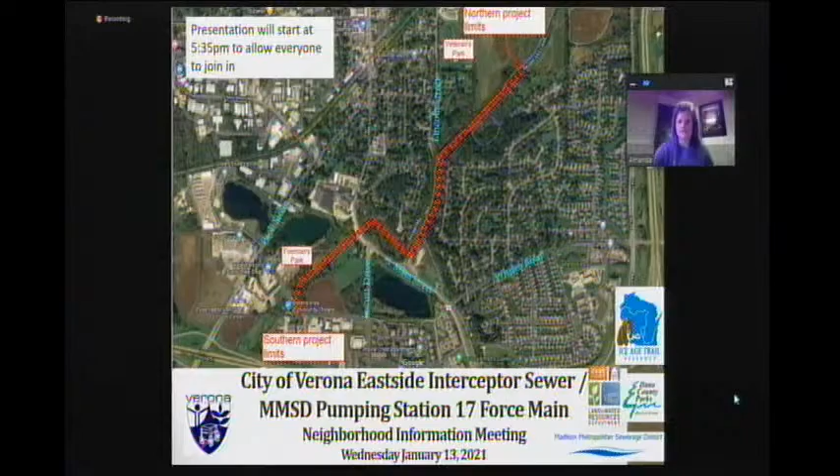We have several partners involved in the project on the call today, and we'll go through those presenters here in a moment.

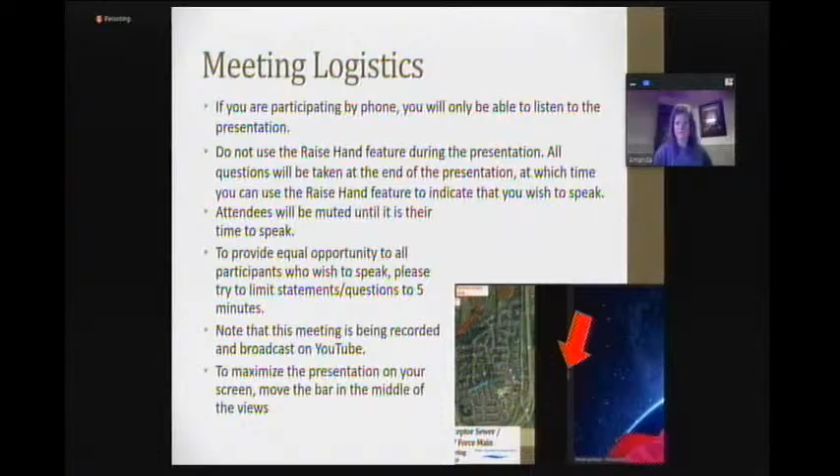So our agenda today: we just went through the logistics. I will talk about the project team and presenters in a moment, all the partners on the project. We'll give a little bit of history about the two projects, 2 in 1 so to speak, the Verona Interceptor and the district's force main, a little project overview. We'll talk through the various routes that were considered and how the decision was reached for the selected route.

Dane County will talk about their portion of the work. Ice Age Trail will also talk about their contribution. We'll talk about restoration of the area, including tree planting. There are a few renderings, and we'll also talk about trees and sewer pipes, since there's been some interest in that. Then ongoing communication, construction schedule, and as noted before, we will cover the Q&A at the end.

So our presenters today: Amanda Wegner, that's me, I've already introduced myself. This project is a joint project between the parties I'll go through now. With the City of Verona, we have Theron Jacobson, who is the Public Works Director, and Dave Walker, who is the Parks Director and Forester. They are both with us today.

With the district, we have Eric Jellin, who is the Project Manager. With the Ice Age Trail Alliance, Kevin Theseus, Director of Land Conservation. And then Dane County Parks and Land and Water Resources Department are here with us this evening: Sarah Riegelman, Park Property Planner, and Teresa Nelson, Stormwater Engineer.

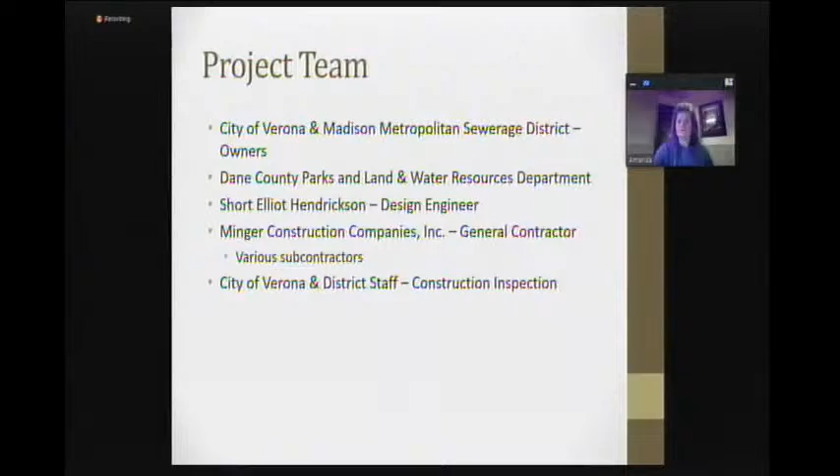The project team consists of the City of Verona and Madison Metropolitan Sewerage District, owners of the project, Dane County Parks and Land and Water Resources Department, Short Elliott Hendrickson as the design engineer, and Minger Construction Companies as the general contractor, with various subcontractors. Construction inspection falls to Verona and district staff.

From here, I am going to turn it over to Eric Jellin with the district. He's going to lay the groundwork, talking about a couple terms you might hear this evening, and then get into the history and a project overview.

Hey, thank you, Amanda, and thank you everyone for your interest and for attending. To start off, we wanted to define a few terms just so we're all clear on what we're talking about as we go through this presentation. There's some fairly technical definitions of terms on the screen here. I'm going to talk about them a little bit differently.

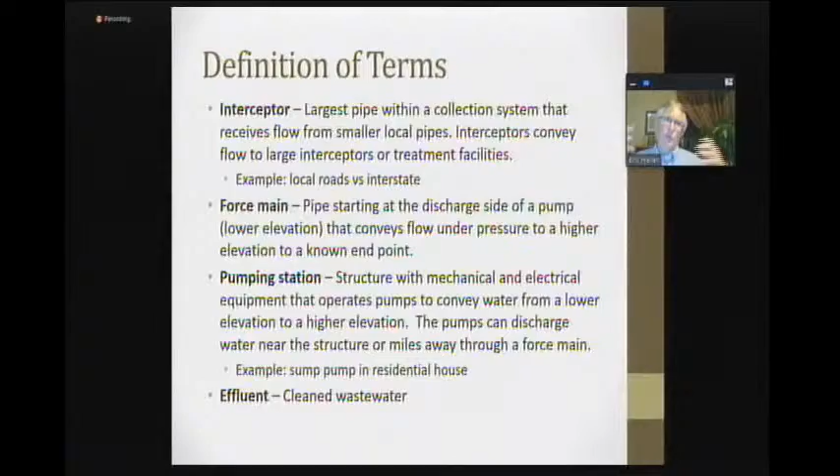So an interceptor pipe is - let me talk about the system first. The wastewater from your house typically goes through a lateral or service connection to a local sewer pipe. That local sewer pipe then joins a larger pipe, which is typically called an interceptor pipe. Interceptors catch neighborhood flows, and an interceptor can flow into another larger interceptor or go to a treatment facility. An example would be local roads feeding into an arterial road feeding into an interstate.

A force main pipe is basically a pressurized pipe. It's on the discharge side of a pump. The pump pressurizes the flow in that pipe and pushes it to a higher elevation. One example would be a sump pump in your basement - that's actually an example of a pump station, but the pipe from the sump pump would be the force main. In this case, obviously, we're talking about a bigger one.

A pumping station is basically a structure with pumps, electrical, and mechanical equipment. It's used to impart flow, to provide pressure to that flow, and convey it from a lower elevation to a higher elevation. Again, using the sump pump example, the sump is a structure in your house, the pump's in there, it pressurizes the flow, and pushes it out, hopefully to the street.

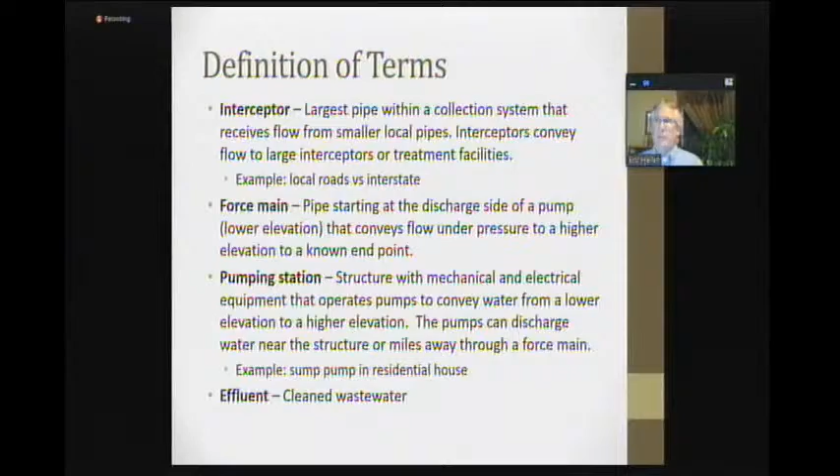Effluent is basically cleaned wastewater. It's wastewater that's treated at a wastewater treatment plant to standards where it can be discharged to the environment.

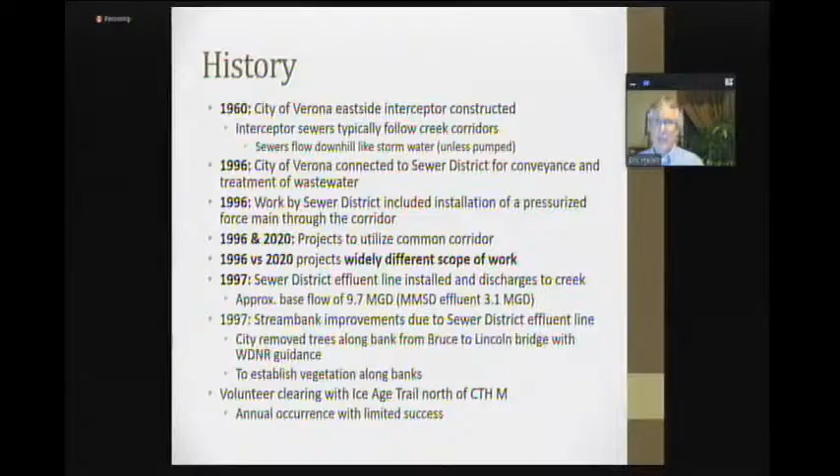A little bit of history on the existing pipes and the new pipes that are going to go in. In 1960, the city of Verona constructed the Eastside Interceptor pipe, and at that time the city treated their own wastewater, so it flowed to the city of Verona wastewater treatment plant. Sewers typically follow creek corridors.

The district has 96 miles of interceptors, and the majority of those are in creek corridors. The reason for that is you need your interceptors to be low enough to catch all the flow if you don't want to pump it. If you want it to flow by gravity, you have to be at the lowest point in the basin, and typically that's also where the creeks are, because they're flowing downhill too.

In 1996, the city decided to connect to the sewer district for conveyance of their wastewater. So basically, the city of Verona got rid of the wastewater treatment plant and instead now pumps all of the city's wastewater to the district. In 1996, the wastewater plant was demolished.

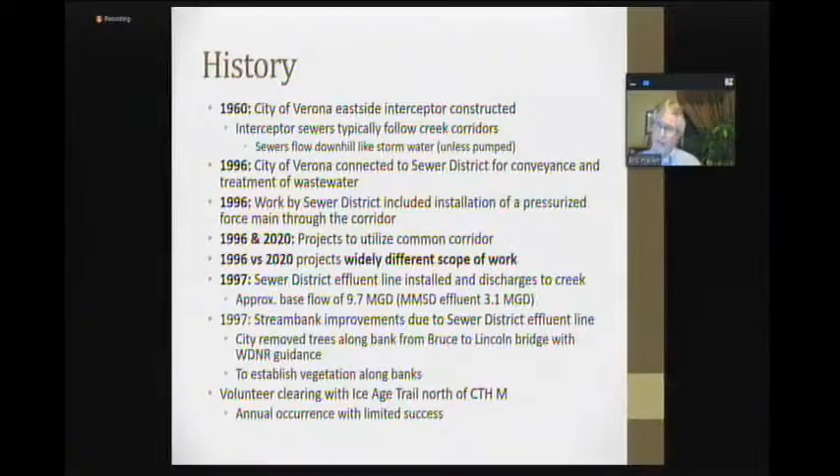The sewer district built a pumping station, our pumping station 17, and also installed the pressurized force main - we call it pump station 17 force main. Basically that's pressurizing the flow, so all of the flow from Verona goes downhill, goes to our station, where there used to be a plant, now that's just the station. It gets pressurized, goes uphill, and the discharge of that force main is actually up at the top, the high point of Cross Country Road.

I'm going to skip the next two bullets and move on - I'll come back to those. The following year, in 1997...

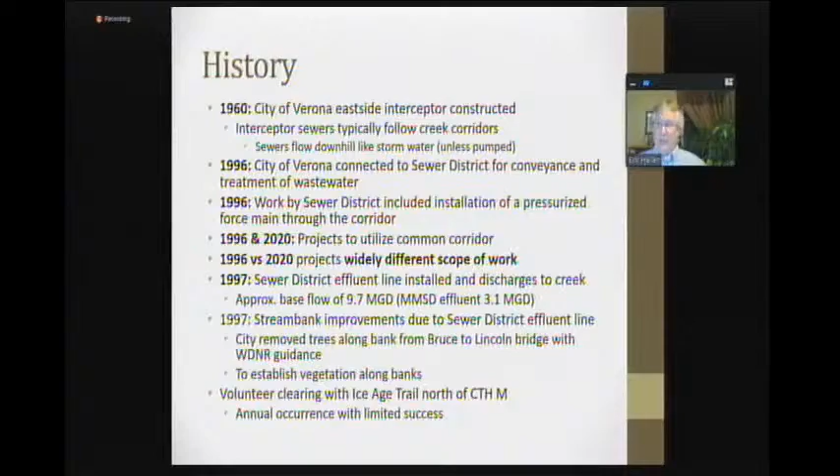In 1997, the district built an effluent line, actually an effluent force main. So the raw wastewater from Verona goes to our pump station 17, goes up to that high point on Cross Country Road, goes down the hill, goes to another pump station. That pump station pumps it up another hill, and again it flows by gravity, goes downhill to yet another pump station, and that pump station finally gets it to our treatment plant, where all the raw wastewater is treated.

So the effluent, the treated wastewater - in '97 we built a very long, 8 or 9 miles long force main that brings a portion of that treated effluent back to the watershed, and that discharges on the east side of Highway 18-151. That effluent actually provides approximately one-third of the base flow of the Badger Mill Creek at Bruce Street.

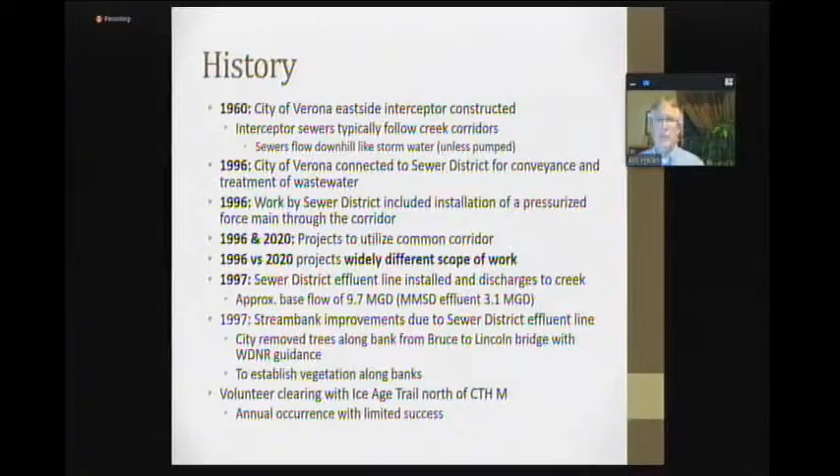Also in 1997, due to that effluent project, the city undertook a project on the stream banks to try and promote vegetation growth. Throughout the years, there's been volunteer clearing along the Ice Age Trail north of County Highway M, and that's an annual occurrence with limited success.

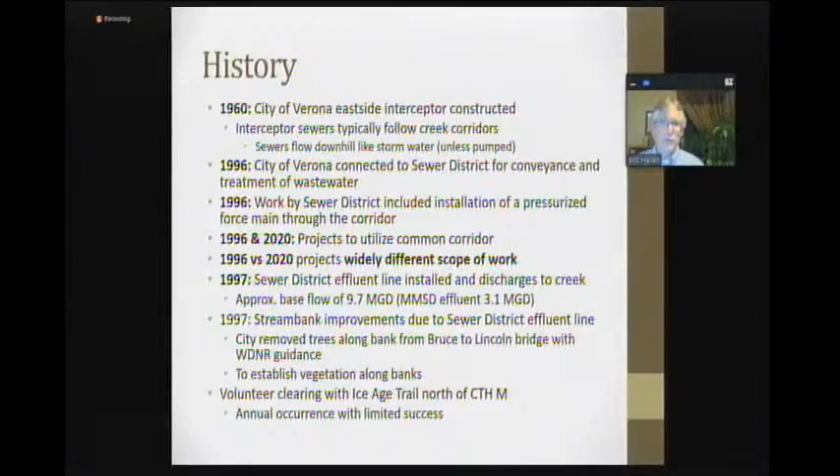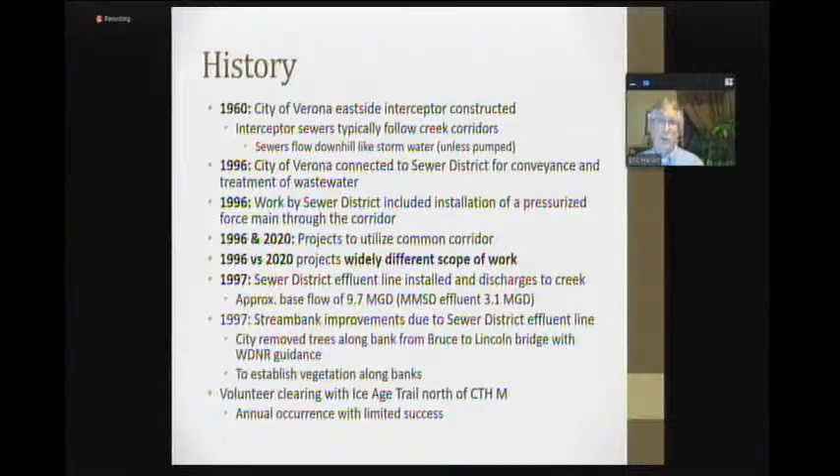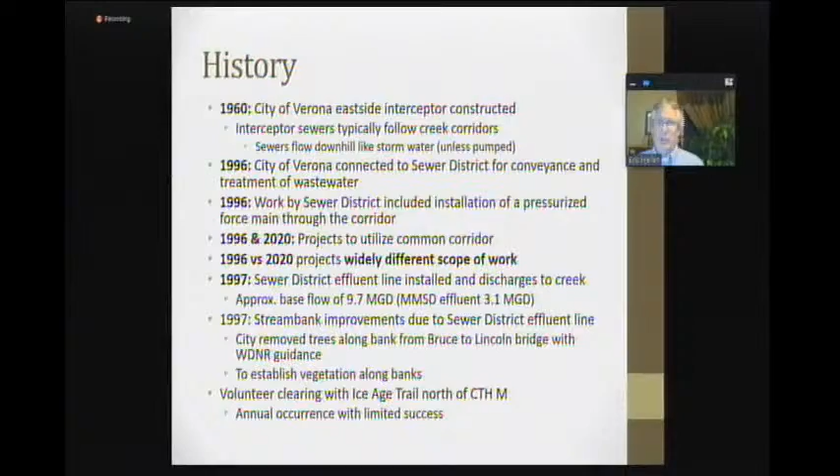Now I'm going to go back to those two bullets I skipped in 1996 and 2020. So here we are in 2020. The original Eastside Interceptor is now 60 years old. It doesn't quite have the capacity that Verona needs anymore to convey all the wastewater down to our pump station. It does have some leaks, so it's time for a new one. These two projects are very different in scope, and we'll go through that on the next slide.

The 1996 force main was a 16-inch diameter force main, average depth 9 feet. It didn't really get a whole lot deeper than 9 feet. Force mains can somewhat follow the contours of the land. You don't necessarily need gravity to have it flow because it's under pressure, so you can keep it a little bit shallower. There are 4 air release structures on there, so in this case it's not always just a straight line. If it goes up and down, you want to be able to release air at those high points. We had 1 creek crossing, and our dewatering operations were shallow well dewatering.

The 2020 Interceptor and force main project involves a lot more. We need to maintain that 16-inch force main, which is currently taking all of the wastewater from Verona and pumping it eventually to our treatment plant, so we need to maintain that and make sure it stays in service. We're also going to install a new 24-inch force main, approximately 9 feet deep, and a 24-inch interceptor, the city's interceptor, with a depth that varies from 12 to 22 feet deep.

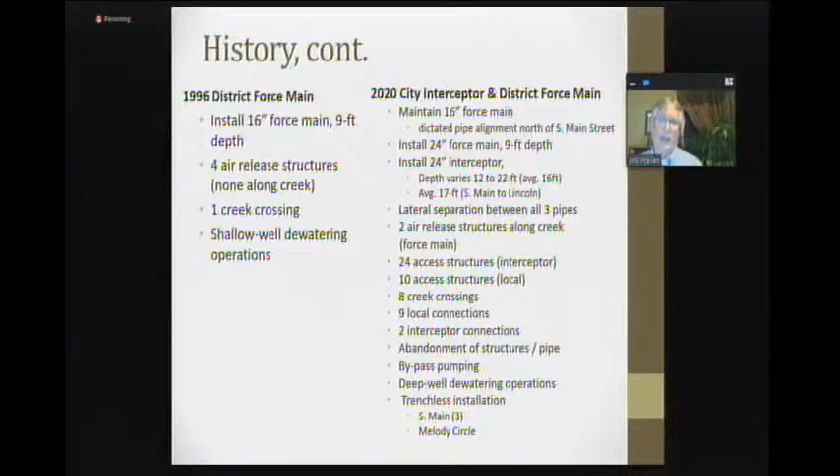We need to keep lateral separation between all the pipes, so we're trying to keep 10 feet of distance between the existing force main, our new force main, and the new interceptor. We're going to end up with 2 air release structures along the creek for the force main. The City of Verona is going to have 24 access structures on the interceptor, and an access structure is a manhole. It's going to be either a 4-foot or 5-foot diameter structure, and that's got to go all the way down to the bottom of the pipe. So those are going to be 12 to 22 foot tall structures, 4 to 5 feet wide.

There are 10 local access structures, 8 creek crossings, 2 of them for the force main and the interceptor. There are 9 connections of local sewers, and 2 interceptor connections—remember, an interceptor can connect to another interceptor, so there are 2 interceptors connecting to the Eastside interceptor. We'll also be abandoning structures and pipe. There's bypass pumping, which you need to do if the current gravity sanitary sewer is out of commission, if you're constructing around it—you need to remove and replace it in place, so you take the flow that would have gone through that pipe and pump it around. That's bypass pumping. The dewatering operations for this project are deep wells, so we drill the wells, and it takes up more room, it's a lot more involved. Also, there's trenchless installation on this project at Melody Circle, and there will be 3 crossings at Main Street.

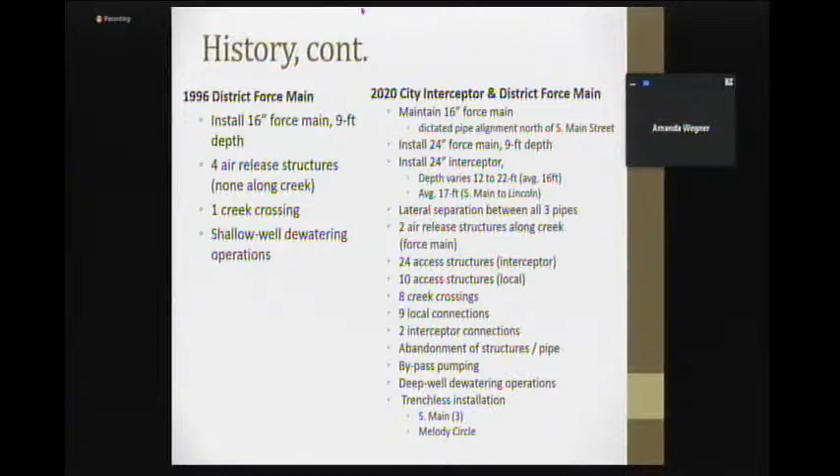Eric, can you just clarify, when you were talking about the access structure and their height, are those above ground or partially above and below ground, just so people have a better understanding?

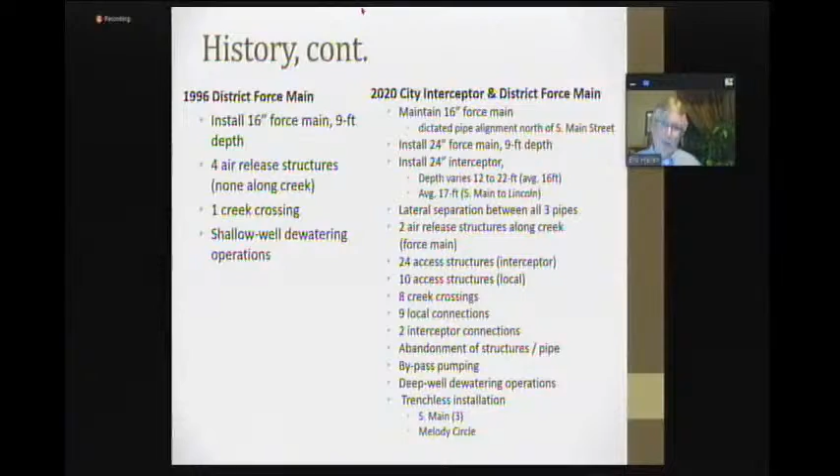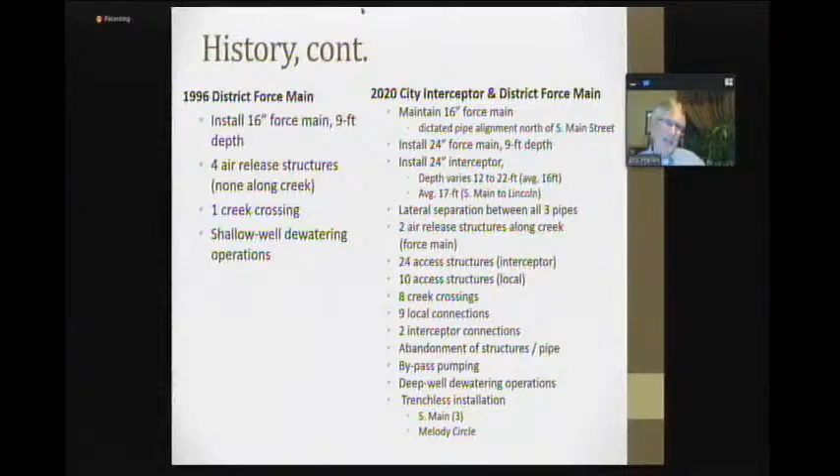Oh, I'm sorry, no, those are below ground. What I meant was that the pipe is 12 feet below ground, so that structure has to go down 12 feet. What you'll see at the top, I think those are cone structures—basically you'll see what's called the casting in the lid, and those are going to be bolted down. You may see a little bit of concrete at the surface, but no, they're not sticking up 20 feet out of the ground.

Great, thank you. I was having a little vision as you mentioned that, so just wanted to clarify for everyone on the meeting today. Thank you. Yeah, we can move on to the next slide.

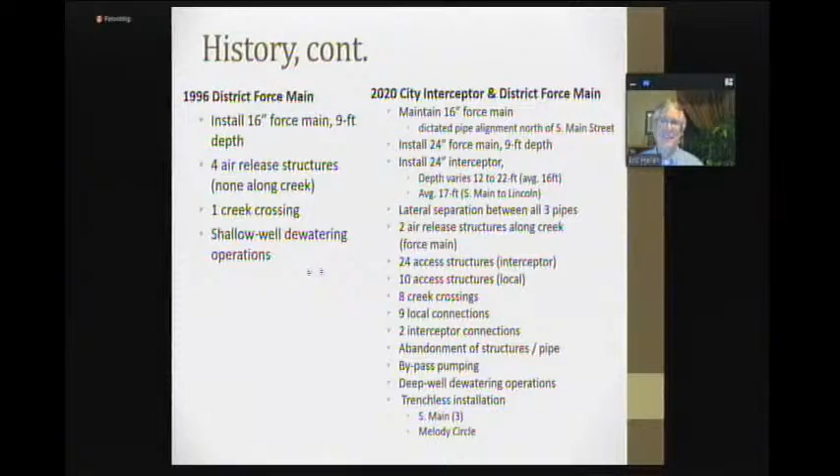So the needs for the corridor, what do we need? It's not just the trench for this. There's erosion control installation and maintenance to keep silt from running into the stream. The dewatering operations, those wells I mentioned, are typically 12-inch diameter casings with pumps put down there, and then I believe there's 18-inch diameter discharge piping coming out of there. Since you're pumping from the ground, you want to make sure that water is somewhat filtered before it gets back into the creek, so it goes through what's called either filter bags, or in some cases I think they built rock check dams with stone that filters the dewatering water from the ground before it goes into the creek.

Again, protecting the existing pipes in the ground there. We need to make sure we stay far away from those.

There will be the trench for the 24-inch gravity interceptor sewer. We'll put that in first because that's the deeper pipe. Then 10 feet over, they'll install a portion of that, fill it in, and then go back and dig another trench 10 feet over for the 24-inch force main.

As they dig that trench, they actually need to dig below the bottom of the pipe and put what's called bedding stone underneath the pipe, and up around and over the top of it as well. That bedding stone takes up a lot of room—you have to have piles of it. I believe there are piles of bedding stone out there right now.

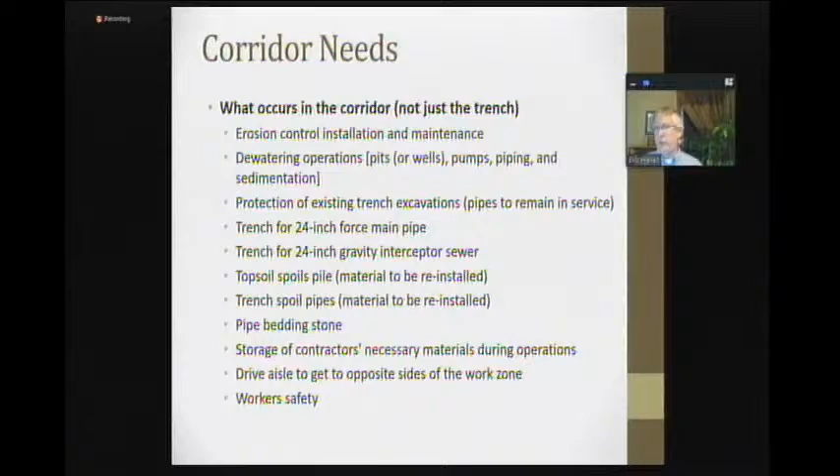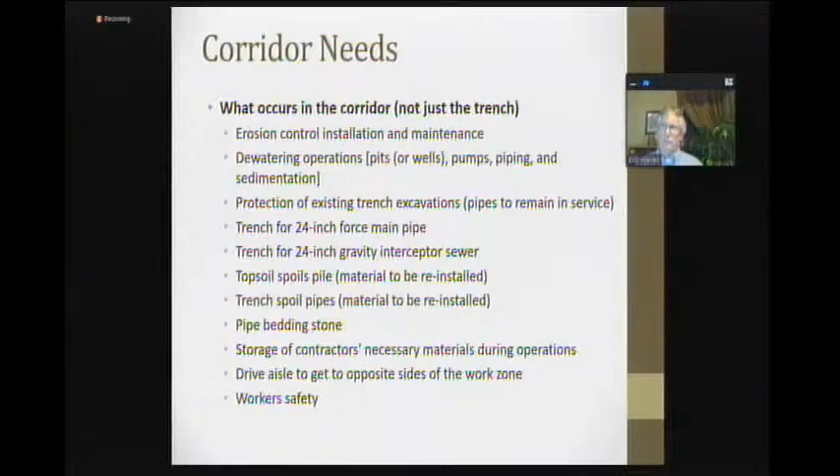Also, there are other necessary materials, like the manholes. Before those get buried, you have to bring them out to the job site, and they need to be stored someplace out there. You also want a drive aisle so you can get to opposite sides of the work zone. And of course, you want to have workers' safety in mind—enough room to keep everyone safe.

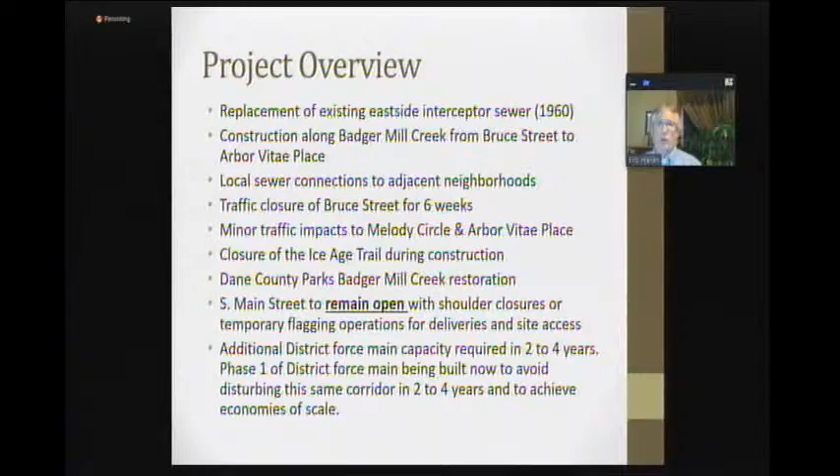South Main Street will remain open—we're doing the trenchless crossings there. There may be some temporary flagging operations when there are deliveries and such to the site. And I've already gone through the additional force main capacity required in 2 to 4 years. Next slide, please.

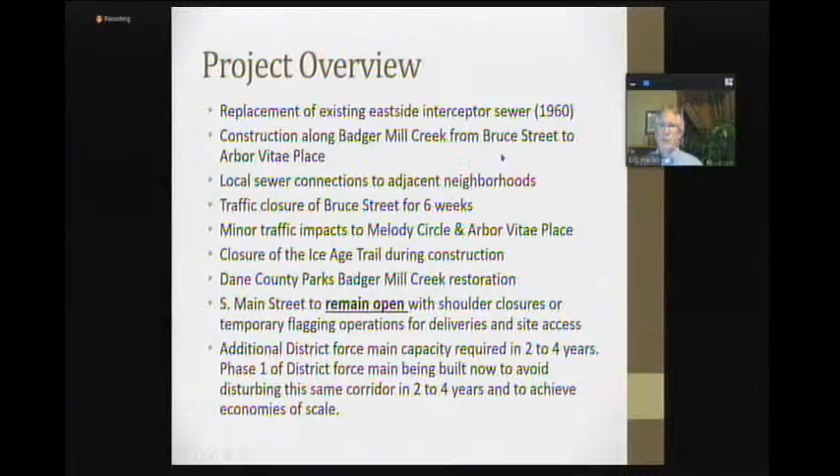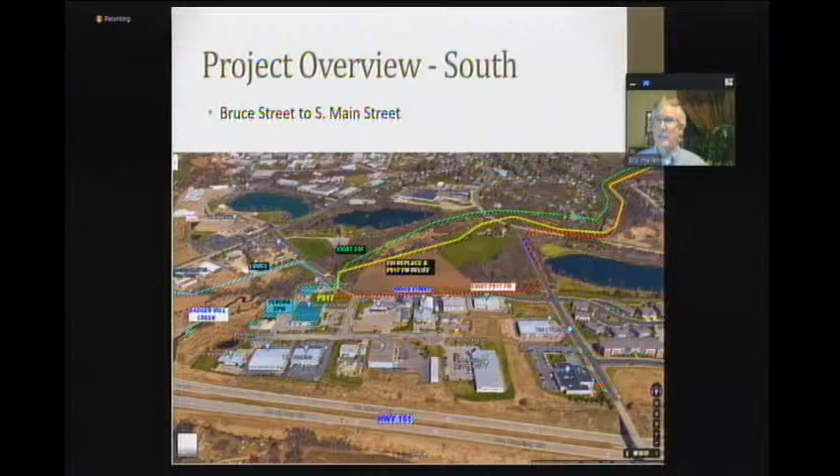And then finally, the red line there is the existing pump station 17 force main that was put in 1996. Next slide, please.

So this is the central section. We'll have two of the creek crossings there, you can see the force main and the interceptor. The red line, you can see where we cross the existing interceptor, where we cross Highway M. There is an air release structure, which I talked about earlier, right on the north side of County Highway M, because at a high point you want to be able to release any air that comes out.

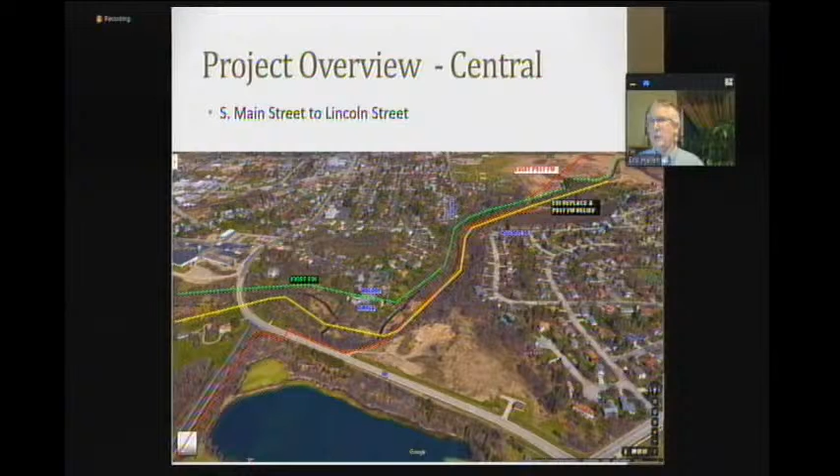There will be work in Melody Circle to reconnect everybody who's connected there right now. We want to reconnect them to the new Eastside Interceptor. I don't think there's anything else on this slide. Next slide, please.

And then finally, this is the north section of the project. Again, the red line is the existing force main. It crosses the creek before the end of this project. Initially, the district was going to stop our project there, but we decided to stay on the south side of the creek and just go all the way to the end of the Eastside Interceptor project. And again, we'll come back for phase 2 in 2 to 4 years, we'll need to connect onto that and then move on to the end.

I'm not sure what else to say about this one. I know Theron has the next group of slides on route selection, so I think I would turn it over to you, Theron, if you have anything to add on the project overview.

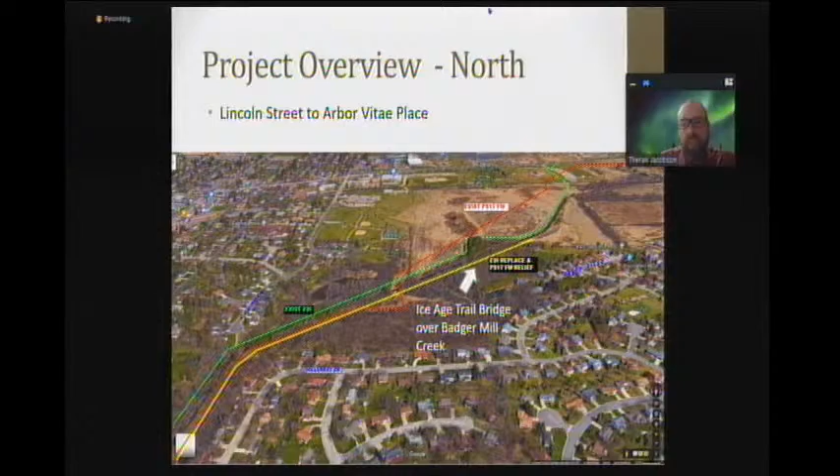Yeah, I think it's just for the project. Good evening, everyone, Theron Jacobson, City of Verona. Regarding Madison Met's future route for phase 2, their force main route selection has not been completed. At this time, that'll be part of their design process when they get to that part of their project schedule for their capital improvement program.

So regarding route selection for a sewer pipe, it could be a water transmission main, it could be a major storm sewer, or even a road. But this layout right here is part of a sewer project.

Criteria used for route selection includes looking at your connection points, reestablishing your local connections, or adding pump stations, which are a significant cost. Ultimately, the 1960 construction and all the local connections created this route. So identifying the exact route where we want to go today while maintaining service for the existing assets in the ground is one of the key elements, and also maintenance now and in the future, accessibility for temporary and or permanent.

Being able to construct it, but then also being able to maintain the assets in the ground. Environmentally sensitive areas, what are out here? Street crossings, how many? Are we going to be open cut or trenchless installation?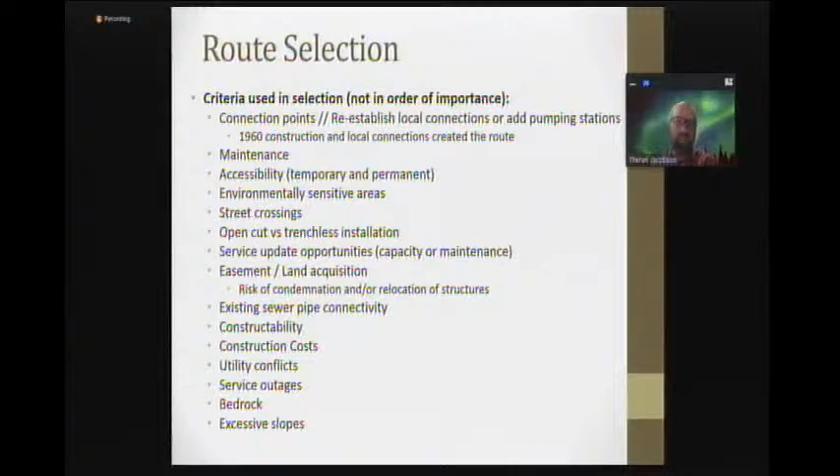The existing sewer pipe connectivity, I kind of touched on that already. Constructability, construction costs - costs are always a concern. We try to keep the project as cheap as possible by doing the right construction methods and products, but also taking everything else into account too.

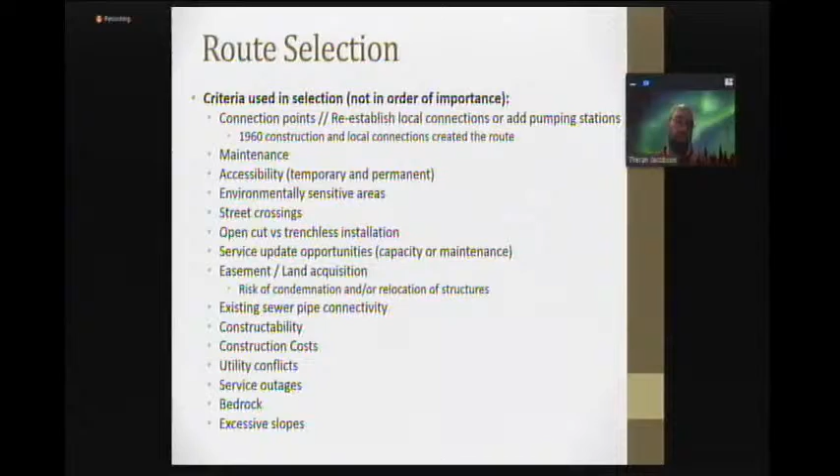Utility conflicts, potential service outage, excessive slopes. What's the terrain like? Can you actually build within this footprint? Are you dealing with severe slopes? Is there bedrock? What type of bedrock? Is it potential cobbles? Is it fractured bedrock? Is it bedrock that you need to saw or potentially blast? These are all things that are taken into the route selection.

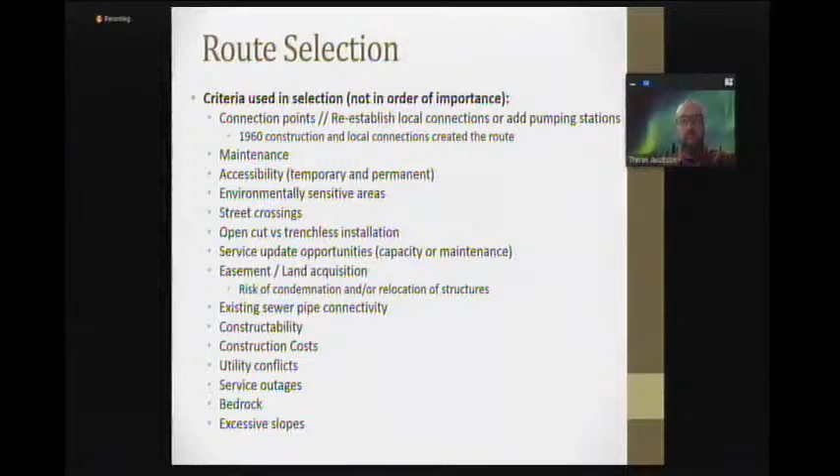So initially there were 4 alternatives that were completed as part of the design process. Those preliminary estimates range anywhere from 6.6 million to 10.5 million, and that includes the city and district project elements. Ultimately, the selected alternative is a combination of alternative 1 and 4, and I have the figures on the next upcoming slides.

Then in December of 2020, after inquiries started coming in regarding the project, we looked at another alternative, and I had our consultant look at it. It was, all right, if the city wasn't going to be along the Badger Mill Creek corridor, or at least minimize that route length along the creek, where would we be? So we did an estimate on that, and it was $25 million versus the 4.5 million of city items in the current construction project. So we're over 5 times the cost. And that only includes the city project elements. The district could still be right along the Badger Mill Creek, so that corridor would still be impacted.

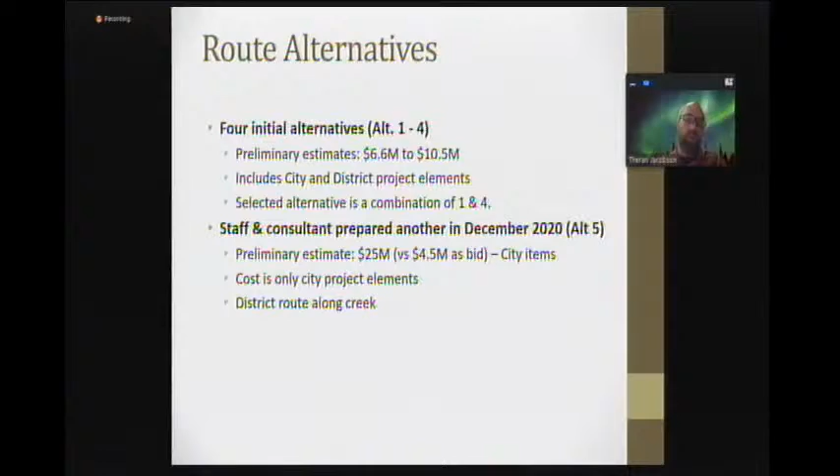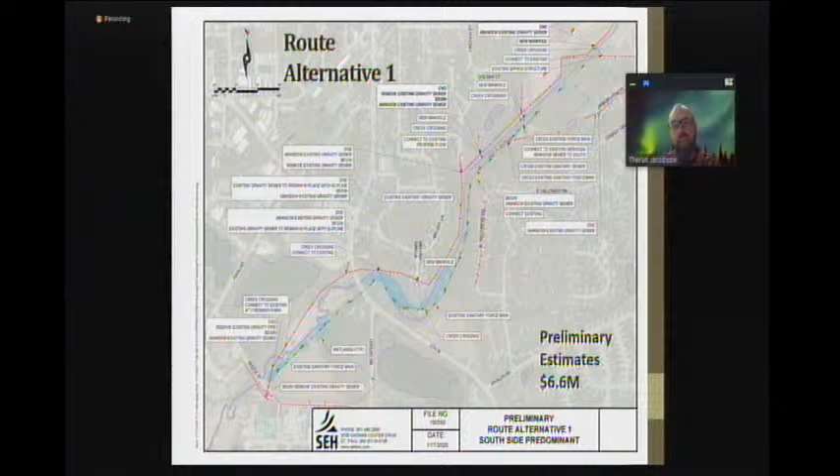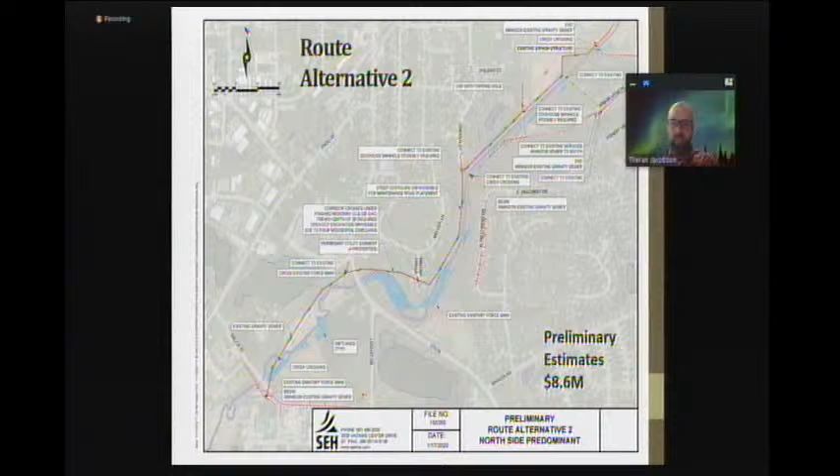Next slide, please. Alternative 2 looked at placing both pipes on the north side, basically following the existing interceptor. Significant constructability challenges - excavation or tunneling around 4 houses in Melody, very steep slopes east of Melody. There are significant constructability challenges along this route, so this route was eliminated as part of the alternatives analysis.

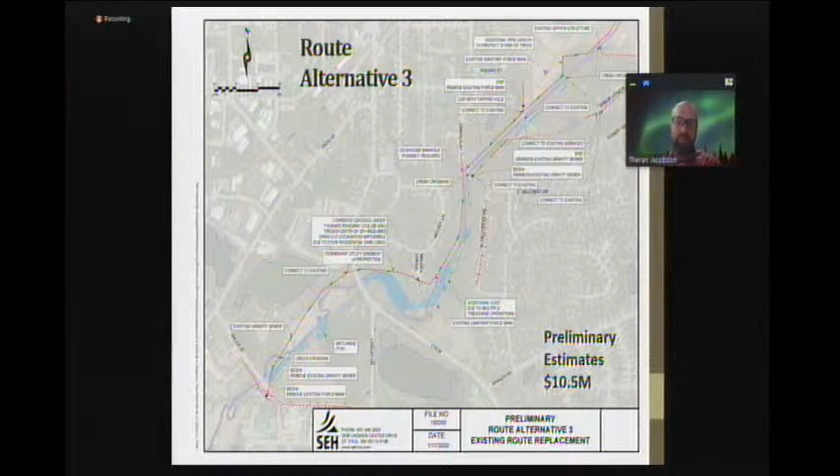This one looked at utilizing existing routes for each asset. So the city of Verona would remain on the north side along their existing interceptor, potentially within the same trench. Significant bypass pumping, major risks, lots of additional easement acquisition along Melody for temporary and permanent. Then MMSD would have been along their existing route down Bruce Street, up Locust, and then ultimately along the Badger Mill Creek corridor. We would have been impacting both sides of the corridor, not just one.

So now, next slide - we also got the cost estimates in the lower right corner of each of these, so you can see how the different alternatives' costs vary based on quantities and constructability challenges and number of bid items.

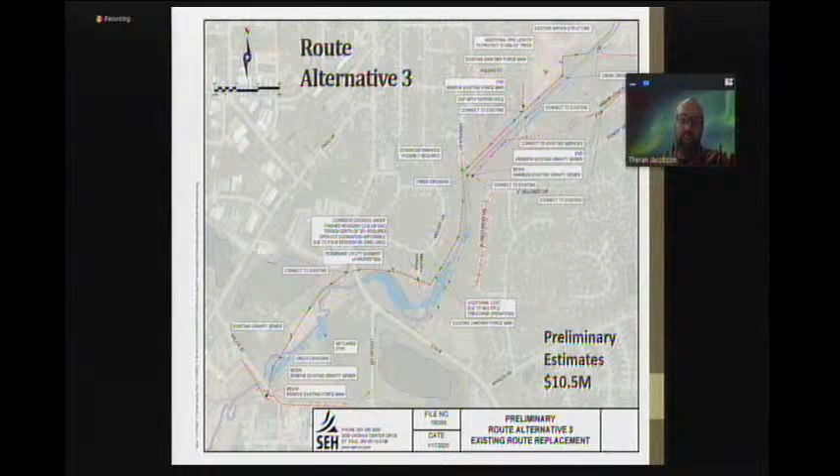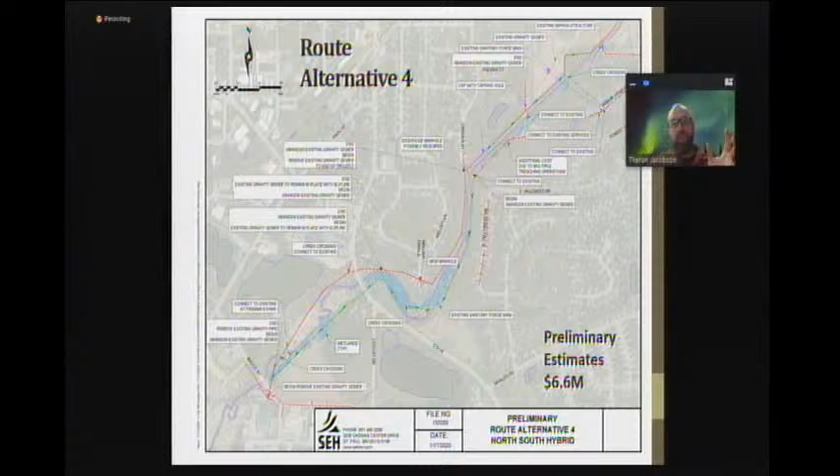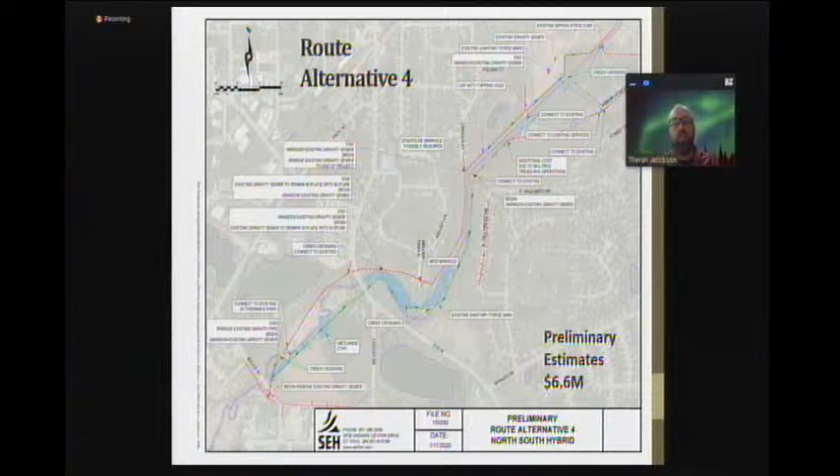Alternative 4 basically put both assets on the south side of the creek from Bruce Street through M all the way up through Lincoln Street, and then the interceptor went to the north side of Lincoln Street to follow the existing interceptor corridor. Force main remained on the south. Ultimately, we took the hybrid of 1 and 4, and we put both new pipes on the south side of the creek for the entire corridor to have a common corridor for the project and for future access and constructability, minimizing other impacts north of the creek and narrowing up the corridor as much as possible.

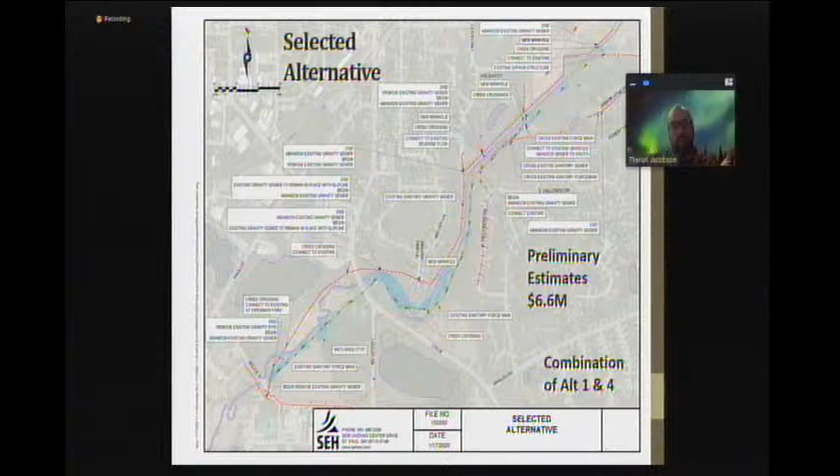So the selected route, the reasons for the selection: minimal easement acquisition, utilize a common corridor for MMSD's force main, confine the corridor, all pipes on one side, the least constructability challenges. We were able to engage in Ice Age Trail improvements. It was ultimately the lowest cost option.

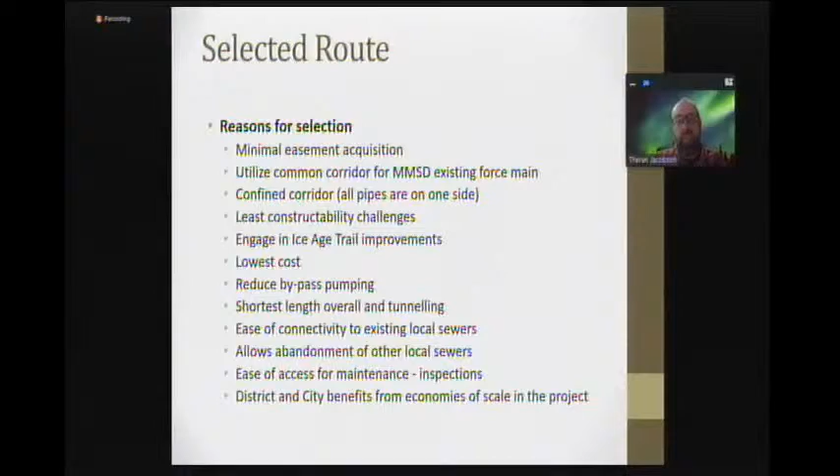We were able to reduce any bypass pumping of the interceptor. There may still be bypass pumping of some local sewer connections, but it significantly reduces the risk and the amount of bypass pumping. Shortest overall length, then also shortest tunneling lengths. Those are very costly elements when you have to tunnel, trenchless installation. Ease of connectivity to local sewers, allows abandonment of other local sewers, ease of access for maintenance, inspections, and then future repairs, future improvements as necessary, and then ultimately district and city benefits from economies of scale of the project.

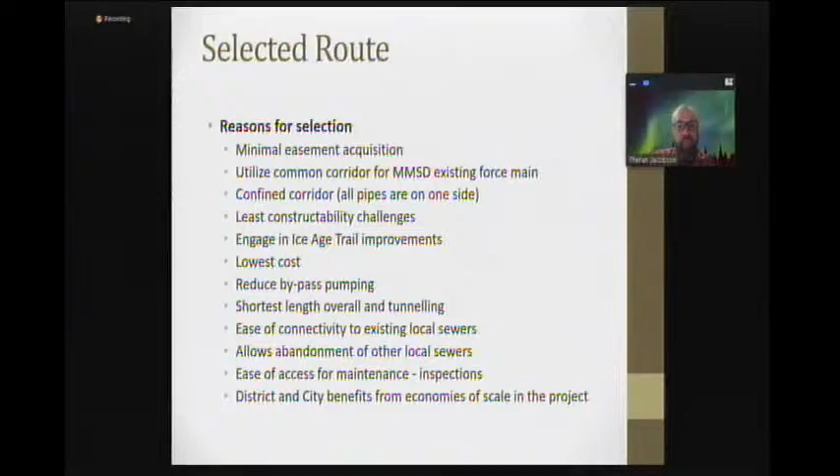We still have major local connections that we would have to reestablish by Arbor Vitae Place and at the Lincoln Street cul-de-sac bridge. There's 3 connections at the Lincoln Street bridge, and then there's 3 connections up by Arbor Vitae also.

If we eliminated the interceptor between the Melody Circle endpoint of the interceptor through Arbor Vitae, we'd have to add 2 additional lift stations also. And if we're not in that route, we would be installing new pipes, gravity and force main within the neighborhoods of Arbor Vitae through Eastview, East Hillcrest, and then down South Hillcrest or down Elm.

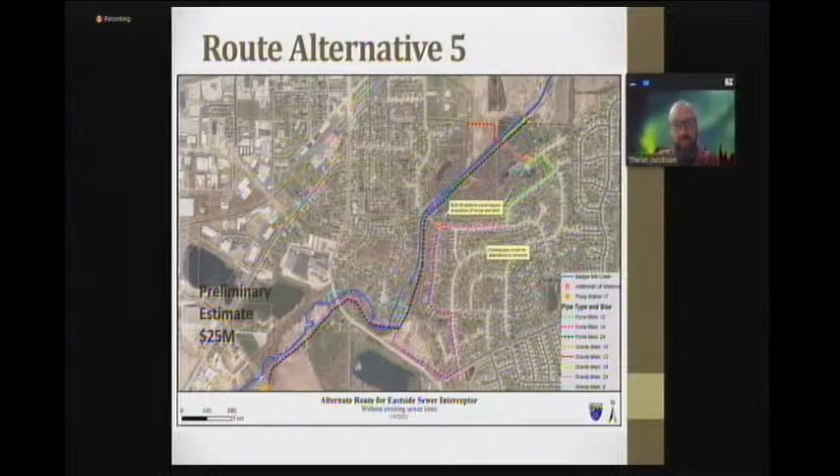Thanks for having me. What I'm going to do is give an overview of Dane County's stream restoration project. So Dane County has always been interested in improving the section of Badger Mill Creek that goes through the county's Ice Age Trail Junction natural resource area. As mentioned earlier, knowing that the sewer project was happening, Dane County saw that as an opportunity to really partner with Verona and piggyback on with their project using the same contractor to restore this almost 1 mile section of Badger Mill Creek that goes from the Lincoln Street Bridge to Old PB, where the Badger Prairie Community Gardens are.

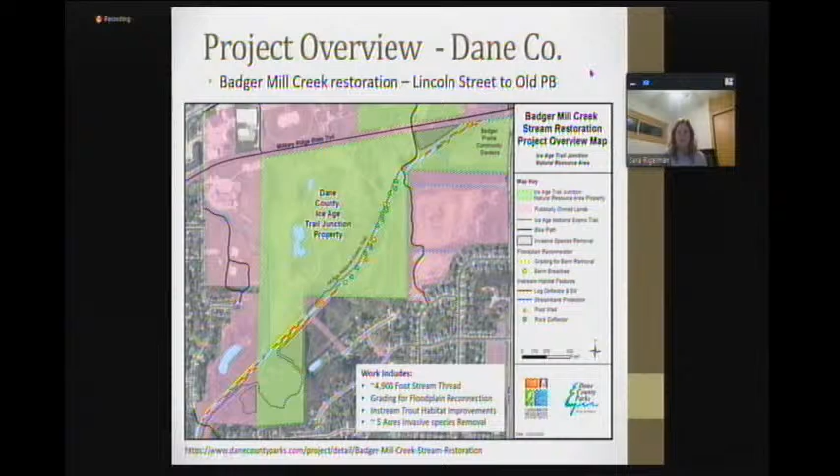Just a little bit of background, Badger Mill Creek is a Class 2 trout stream. The project is probably on one of the most degraded sections of the stream. It's very straight, shallow in size with little to no habitat or cover for trout. There's also some man-made berms that are along the banks that really prevent the stream from being connected to the adjacent wetlands and create a lot of the steep eroded banks that you see along this section.

And really, the goal of the stream restoration project is to improve trout habitat and reconnect the stream to its floodplain. So what I'll do is just kind of walk you through from the southern limits of the project area through the north through our plans here. And I do want to mention that this plan was developed in consultation with DNR fishery staff.

They're the ones who really recommended the in-stream habitat features that you see on this plan. So if you want to start on the south end, the brown lines that you see here are where the log deflectors and log sills will be installed. They create this checkerboard pattern that'll bounce the stream back and forth, creating some meanders within the channel.

A lot of the wood structures will use trees that were harvested or removed as part of the sewer project, and that needed to be taken down for some of the grading for the stream restoration work. So we'll be using the whole trees, the tree trunks with the roots, the root balls and the tree tops, layering those on top of each other to create these log sills. That's really going to help narrow the channel, increase depth, and create those natural meanders within the channel.

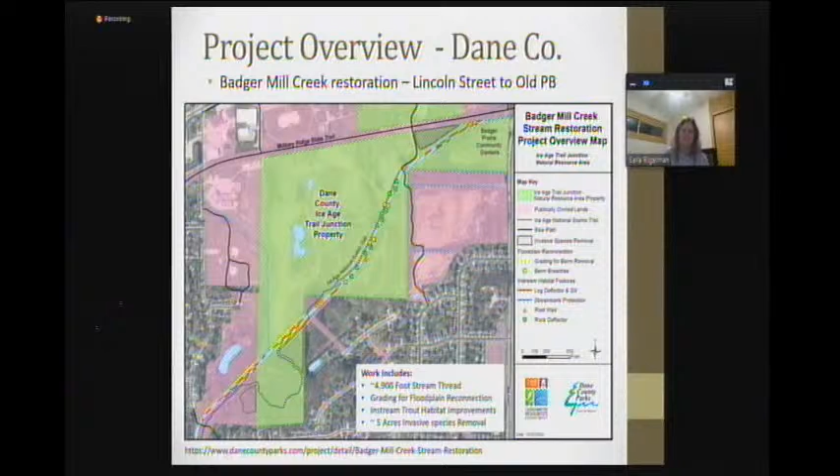During high water events, the stream will basically spill into the floodplain and dissipate, really decreasing the velocity that has caused a lot of the bank erosion that you see there today. So we're going to be decreasing the velocity, and basically it will not erode those banks anymore.

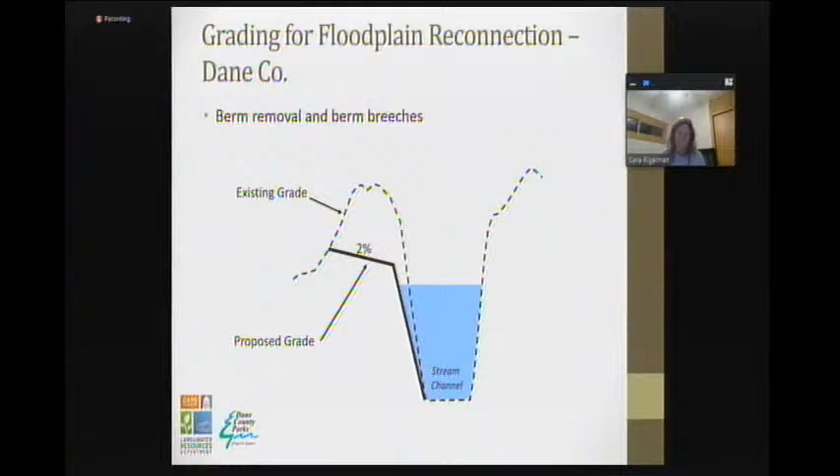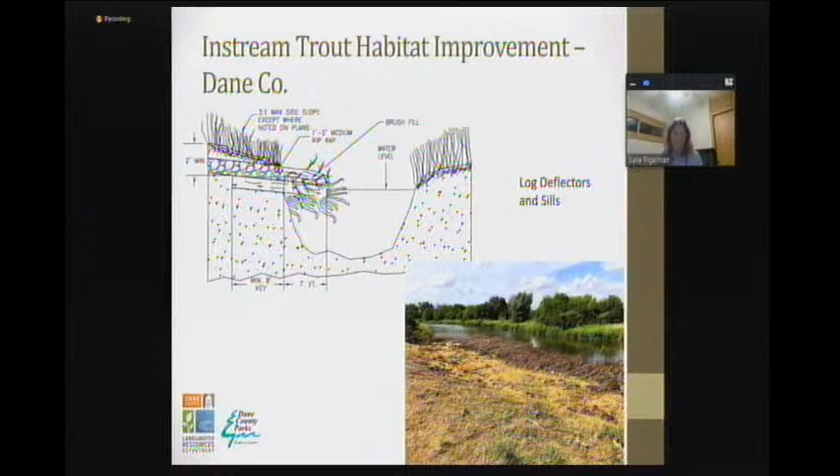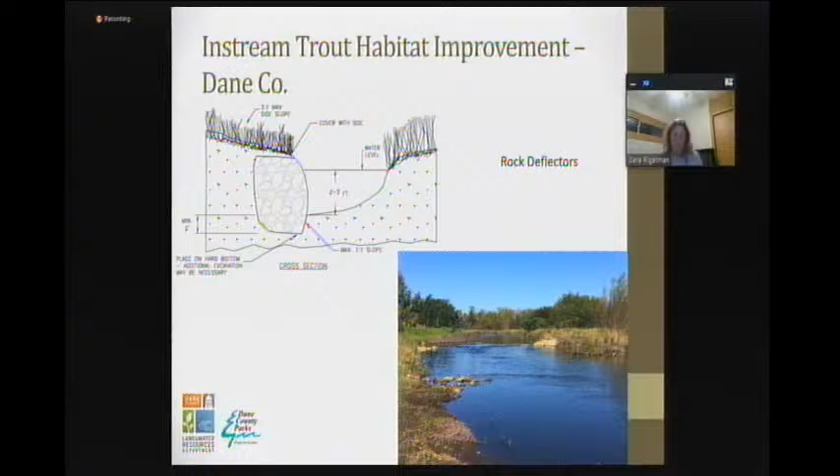This is a cross-section and picture of a rock deflector. These are oriented upstream into the flow, and similar to the log deflectors and log sills, will start to induce some of that sediment deposition behind them, and also create some riffles, improving dissolved oxygen, and creating some of those more natural meanders by bouncing the stream back and forth.

So that's what I had for covering the county's portion of the project. Hopefully this gives you a little bit better understanding of the project, and I look forward to answering any questions at the end.

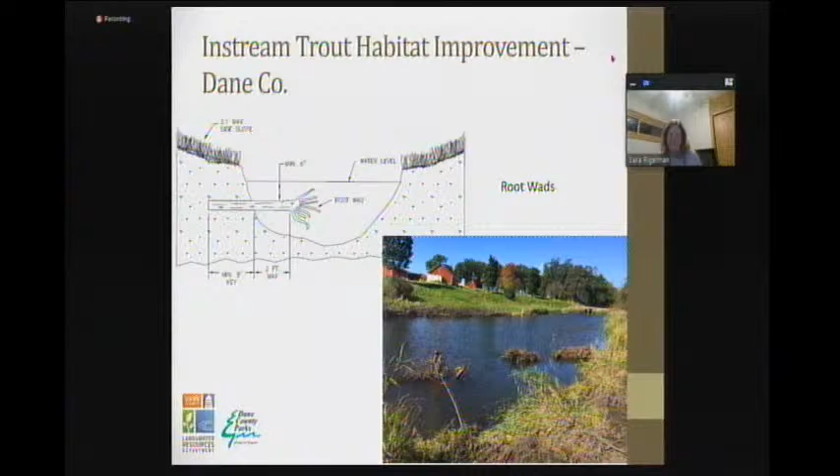Good evening, everybody. A little bit first about the Ice Age Trail in general, and then we'll sink down and focus in on this project.

The Ice Age Trail is one of 11 national scenic trails in the country. It is over 1,000 miles long when it will be completed. We have approximately 670 miles that we consider open and signed and ready for folks to use. The Ice Age Trail Alliance, the organization I work for, is a nonprofit organization.

We partner with groups like the National Park Service, the DNR, and many other partners like the city and Dane County. We have 13 staff headquartered here in Cross Plains, but our real muscle out there in the field is our local volunteer chapters, including here in Dane County.

Partners like the city and the county allow the Ice Age Trail to cross their property, and we partner with them to ensure proper signage is out there, ensure that we are in a position or place that they are happy with, and that is what's happened here over the years in the city and with the county in this area.

Typically it's our Ice Age Trail Alliance volunteers that keep the trails open, that have worked hard to make sure the signage is good, to beat back those invasive species. They do a lot of restoration work as well.

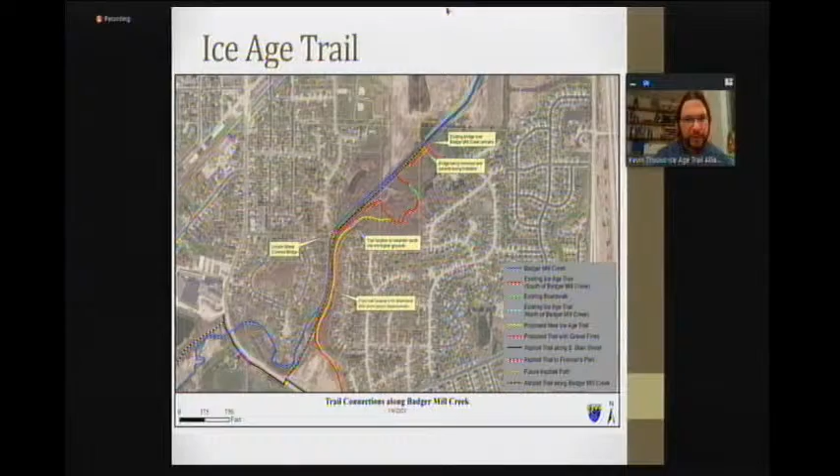For safety reasons, as mentioned earlier, the Ice Age Trail is closed. We've put this up on our website. We've put this on our app.

But we are quite lucky to find, we worked with the city again to find a really nice reroute. We don't always have a reroute when a segment is closed. In this case, we ended up with a pretty favorable reroute that goes through downtown and on the Military Ridge Trail. We will probably, this will be closed, I think, at least until 2022. We're not sure exactly when.

We're waiting to see how things come back. We're not going to open up just a piece of this trail — we'll probably open it all at one time. Sara mentioned some berm breaches on the eastern end of the project area, and we want to make sure those are safe. We're thinking a boardwalk or something similar to complete the breaches. We also want vegetation, grasses and seeds, to start coming in before people start stepping on the Ice Age Trail. We're not entirely sure, but we're thinking sometime in 2022.

The Ice Age Trail Alliance and the Ice Age Trail are here for the long haul. We're willing to accept that it might take a few years. Our local volunteer chapter in Dane County has done a lot of restoration work, and we all understand it's not going to be beautiful tomorrow, but it will be in a few years. I'm happy to answer questions at the end of the presentation today, and thanks for your time.

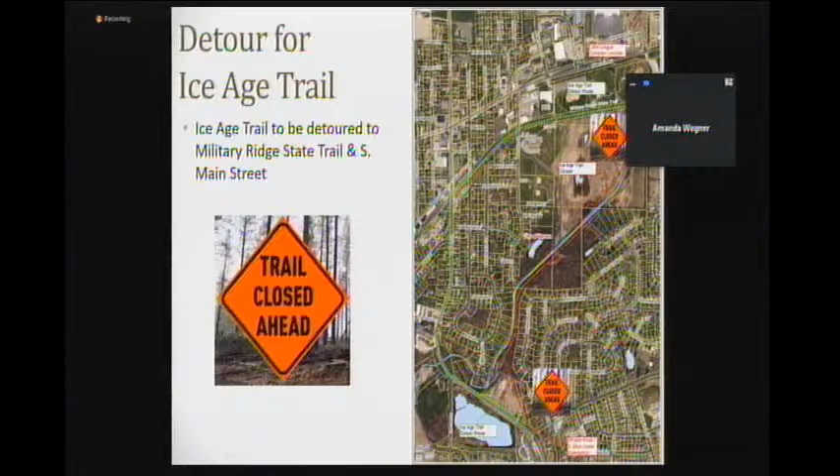Thank you, Kevin. Now we're going to turn it over to Dave Walker with the City of Verona to talk a little bit about trees and restoration along the corridor.

Let's talk about what was in the corridor a few months ago. There were a lot of volunteer trees — some regrowth from the 96 Madison Met project, and some just growth from neglect in the stream corridor over the years. Species like cottonwood, box elder, willow, soft maples, and mulberry — a lot of these are still on the west side of the creek in the corridor, which wasn't cleared.

Invasive species, which the county also talked about removing on their property — buckthorn and honeysuckle, two of the worst we know of — are still present on the hillside below Hillcrest and also below Melody Lane. It's going to be an ongoing struggle to keep those out and to keep that corridor clean for its entire length.

We also know that along the middle section below the houses on Hillcrest, there are some pretty high-value oak trees and a nice native oak woods. That's what we'd like to repopulate the area with once the restoration efforts begin.

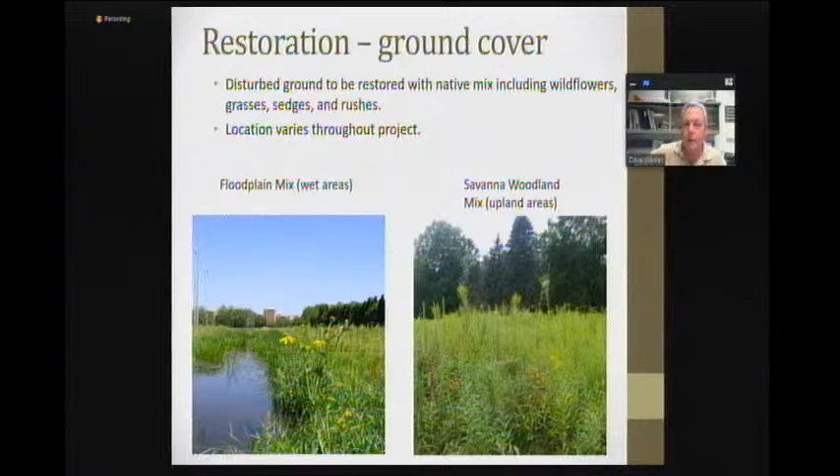Through the whole project corridor, the ground cover vegetation has already been spec'd for the restoration. What hasn't been done yet is the trees. As Kevin alluded to, what we're trying to do here is get the project done, get the vegetation, the ground cover, at least planted and established. Then the Ice Age Trail will come in and route the trail where it's most advantageous to do it.

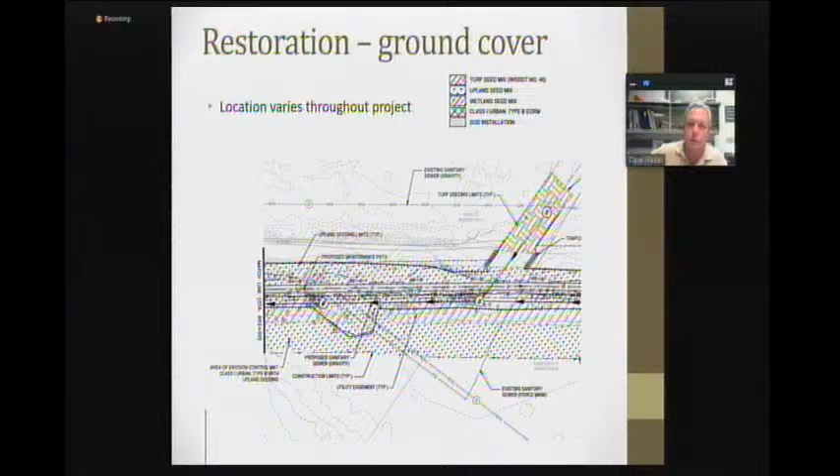There are some pocket wetlands that need to be avoided. There's some opportunities where we can improve the grade for them, provide a better corridor. Once we route that trail in addition to the paved trail, then we can identify areas where specifically we can plant trees, and that's what the next slide shows - a variety of trees that we'll look to put in there.

And then we'd also intermix some conifers in there for some winter interest. Obviously, if you look through the corridor there now, there's already some conifers in there. There's a row of Norway spruce just north of the Lincoln Street Bridge that will remain. There's a few other mixed pines in there as well, so we'd look to interplant a few of those just to keep some interest and a little bit more diversity, if you will.

It's also important to note the timing of this, because most of these upland species, particularly the oaks, the hickories, hackberries, and even birch - the nurseries only dig them in the spring. They're labeled spring plant only. So what we're looking to do is probably plant these earliest at spring 2022, after at least the cover crop for the prairie planting has started to establish.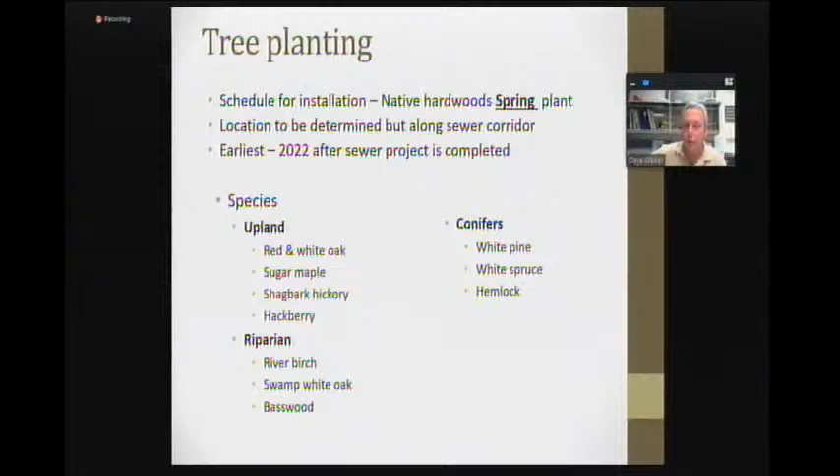And then the Ice Age Trail is routed, and we identify planting areas and where we can put particular species, avoiding the pocket wetlands and rock outcroppings and other natural features that already exist through the corridor. Okay, now next.

Let's talk a little more about the approach. If you're going from Highway M north up towards the county land, the area on the right side, on the Hillcrest side of the multi-use path and the Ice Age Trail, we would define that more or less as the upland area.

And the farther you go north towards the Lincoln Street Bridge and beyond, the drier it gets, and you'll see there's more upland seed mix, more opportunity to plant native hardwoods, oaks and that sort of thing. Then on the Melody Lane side of the path, between the path and the creek, we would look to establish more of the riparian tree species.

The idea is not to put a dense woods back in there, but more of a savanna type area. There are places with some thickly planted forested areas, but for the most part, through the corridor, you'll see the paths, a prairie, and intermittent tree plantings. To keep a prairie and good vegetation established there, we need to keep a fair amount of light at that corridor.

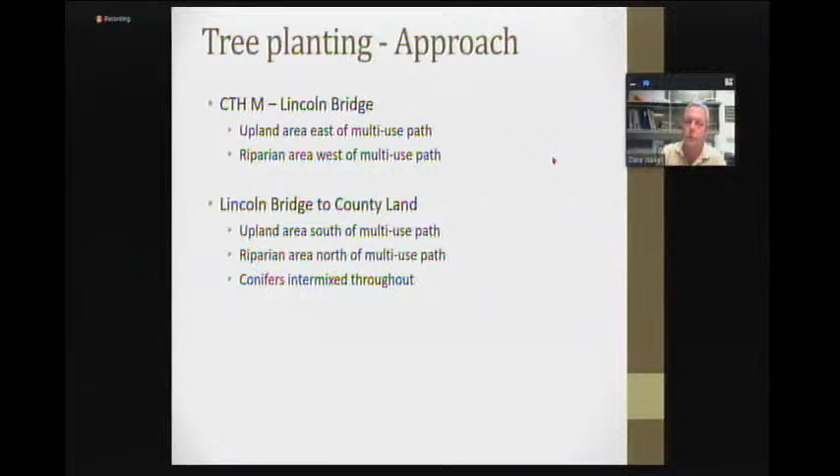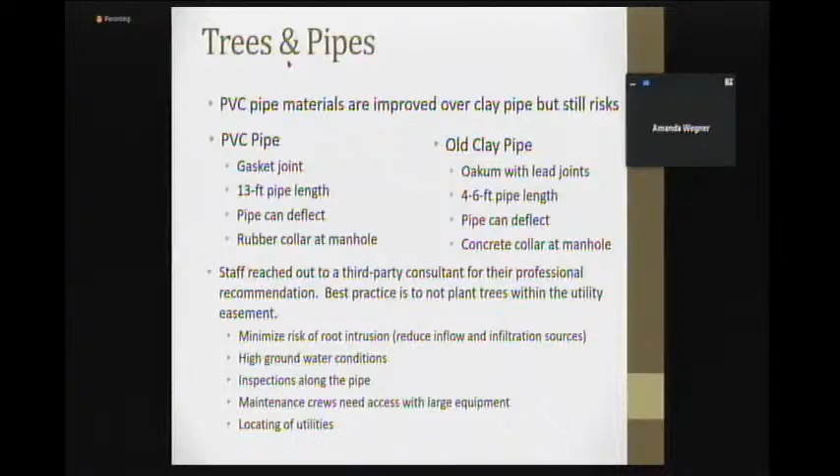Thank you, Amanda. So, trees and pipes. There was a video presented that most people have seen regarding root penetration in clay pipes versus PVC pipes. Clay pipes are old, they're not widely used or used at all anymore. PVC pipes are the primary material for sewer systems, but nothing is foolproof.

So just a little background on old clay pipe versus new PVC pipe. The joints are now rubber gasketed in PVC pipes versus an oakum joint with lead joints, where the oakum would swell as you pour the liquid lead on it. Pipe length is greater for the PVC pipe versus a 13-foot or 20-foot length, depending on manufacturer. The old clay pipe was 4 to 6 foot, so you have more joints along your system with old clay pipe versus new technology.

Both pipes can still deflect. You still have a potential for grades to change based on fluctuations in the ground with either water or other activities that may occur, and those deflections can create open joints.

Your manhole connections now have a rubber collar which is sealed, versus an old concrete collar at a manhole which was sealed at the time, but as it ages will crack and allow water in, which is what Eric was referring to as the leaks in the Verona system before.

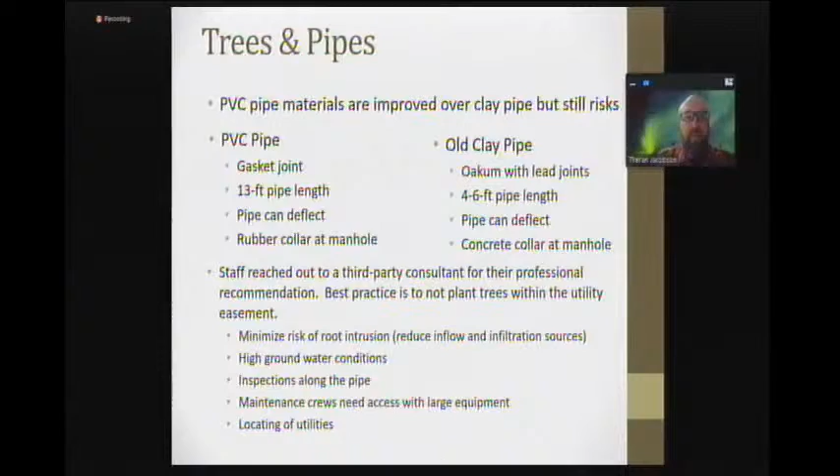Staff also reached out to a third-party consultant, not part of this project, to get their professional recommendation. Ultimately their conclusion is the best practice is not to plant trees within the utility easement, not just for the inflow element, but because we have high groundwater conditions here. Ultimately, any breaches in your pipe will introduce inflow to the system.

You also need access for maintenance vehicles, whether it's sewer cleaning, pipe assessments, or rehabs. You need to be able to walk the corridor, see the corridor, and check for sinkholes along your alignment, which could indicate a settling trench or a collapsed pipe. A collapsed pipe would be a worst case scenario, which could ultimately create a sewer overflow, a leak, or a discharge to the creek. And then there's locating the utilities.

And any maintenance activities that occur with a sewer system involve very large equipment. Our vac truck that the city owns is actually the largest piece of equipment that the Public Works and Utilities Department has.

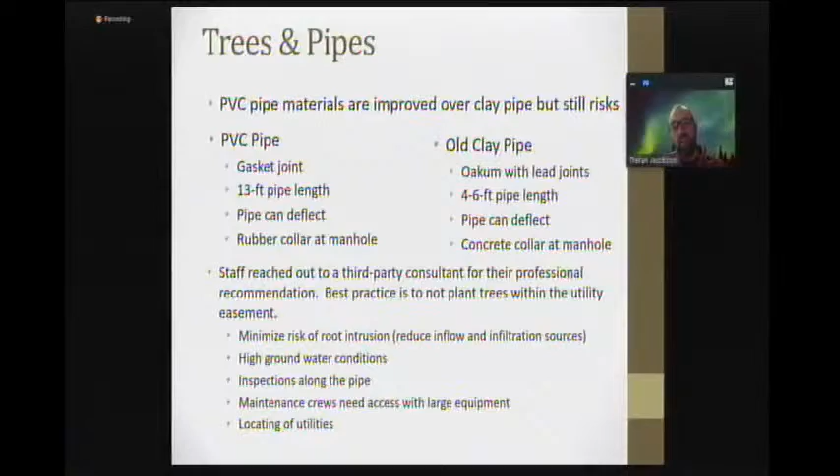Fully loaded, it's 40 feet long and weighs over 60,000 pounds. A small token compared to earth moving equipment, but it's a large piece of equipment that does not have very good maneuverability with a straight axle truck. So those are the reasons for recommending leaving the corridor clear within the pipe area, but utilizing other areas like Mr. Walker identified, the uplands or areas by the riparian zones where you're not going to impact the pipe.

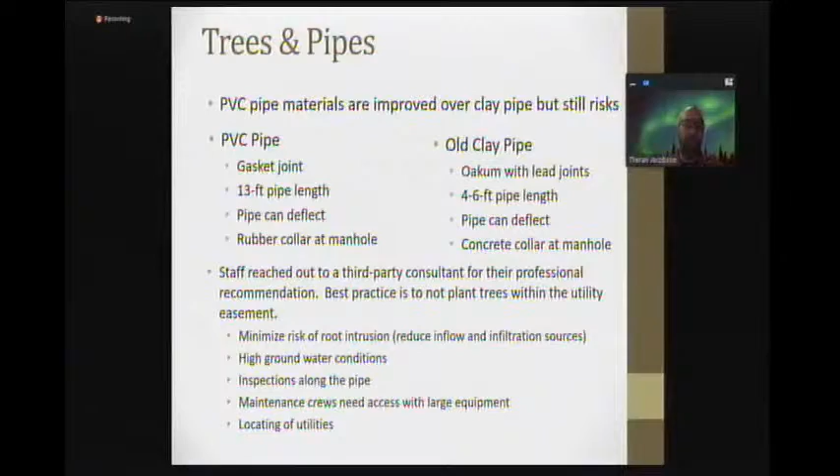And that's all I have on that, Amanda. Okay, these next few slides show some cross sections and renderings of what we envision this will look like when completed and matured.

This corridor gets fairly thin in some areas, so we'd like to keep as much separation between the two as we can. We think we can keep 25, 30, 40 feet, though in some sections it may be as little as 10. But most important, directly under these paths is where the pipe locations are—so kind of double duty, we've got the path there with the pipe underneath it.

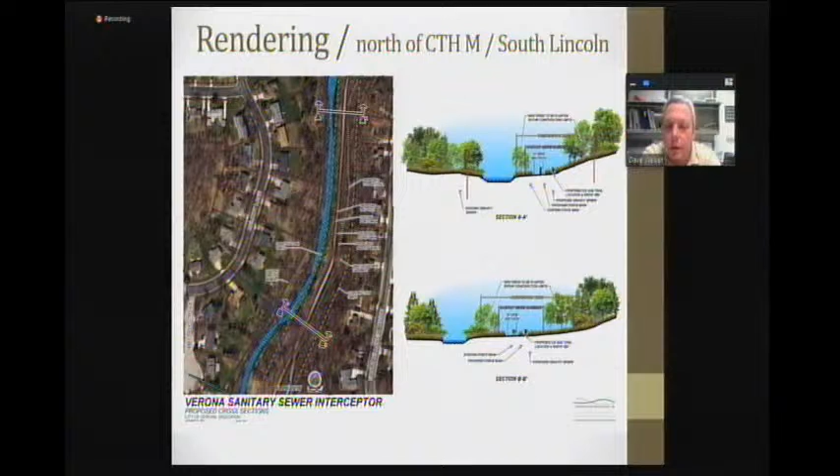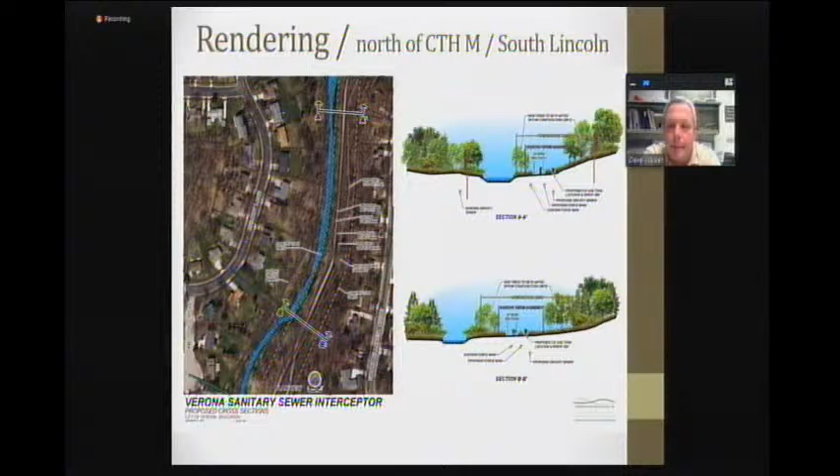So as you go to the right of where the Ice Age Trail is located, you get more into the hillside, transitioning into the slope area, and that's where we'll have the opportunity to plant a fair number of upland tree varieties. Both of these sections are going to be fairly similar. As we head north, we'll go to the next slide.

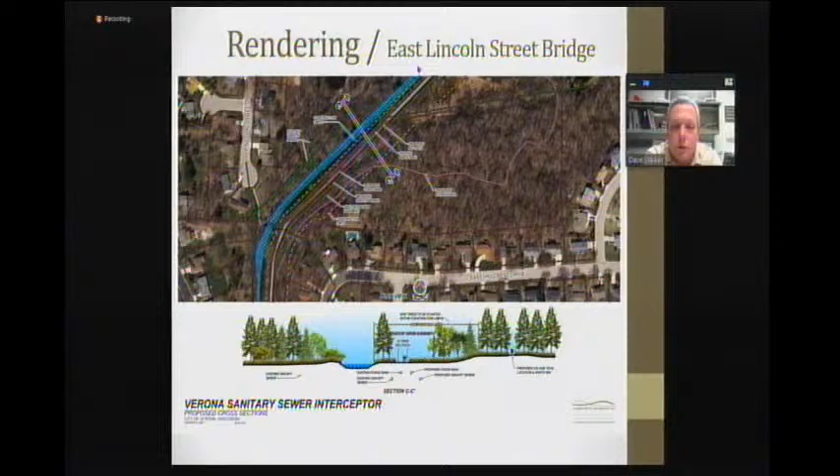This is kind of what we would envision this corridor looking like at maturity. Okay. All right, Theron, back to you.

Thank you, Amanda. Some of the watershed improvements the city's been doing have been more on a localized level, not the regional level that Dane County is doing on this project. This is just a list of some of the projects the stormwater utility has done within the Badger Mill Creek watershed. There are other projects the city has done in other parts of the city that don't drain directly to this watershed.

In 2013, the Lincoln Street channel was rehabilitated from Lincoln Street to the eastern property limits of city hall, city center. We also replaced the culvert under Lincoln Street to increase capacity and minimize flooding upstream. In 2017, we dredged out the Silent Street Pond—it's a wet pond just west of the library.

In 2017, phase 2 of the Lincoln Street channel rehabilitation was completed. That went from the phase 1 limits to the mouth of that channel at Badger Mill Creek. The project entailed reshaping of the bank and reestablishing vegetation, improving capacity based on the increase in the cross-sectional area of that channel.

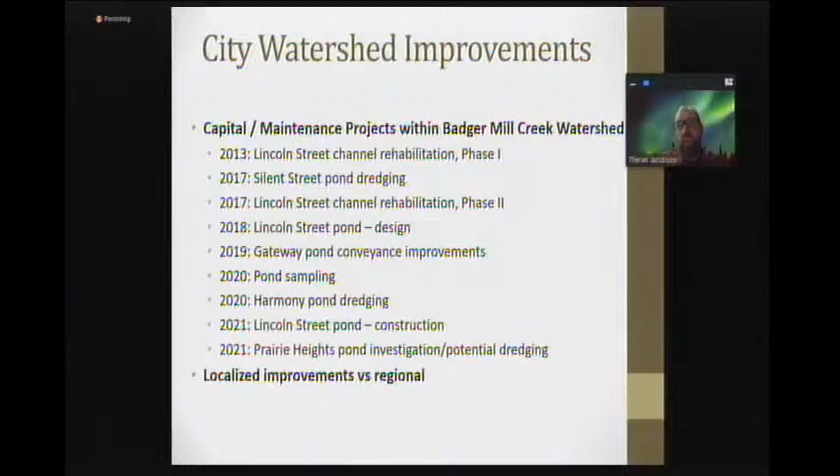In 2019, we did some conveyance improvements up by the Gateway Pond. In 2020, the pond sampling was completed, and that's still ongoing, with staff working to identify other ponds within the city that would be put on a dredging schedule based on sediment loads currently in the pond.

In 2021, the Lincoln Street Pond construction will begin. Also part of that 2020 sampling project is completing the investigation of the Prairie Heights Pond, adjacent to Reddan Park at Cross Country Road, and potentially dredging that out too. So once again, we've been looking at localized improvements, not getting to that regional scale yet. Yet is the key word.

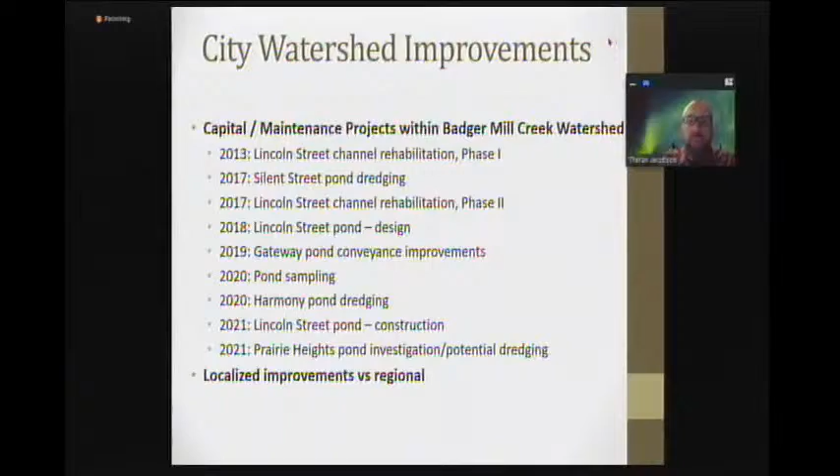Communication, increased communication requests. So we're going to have monthly Zoom meetings. It'll be the third Wednesday of the month, starting this month, next week on the 20th at 5 p.m. I will be there, and I will also have my construction engineer on site.

Overall construction schedule has not changed since the beginning: November 2020 through October 2021, with Dane County's work primarily occurring in July through August. Of course, schedules are always dependent on weather, whether it's winter or summer with rains and flash floods along Badger Mill Creek. Schedules change, but we will always adapt.

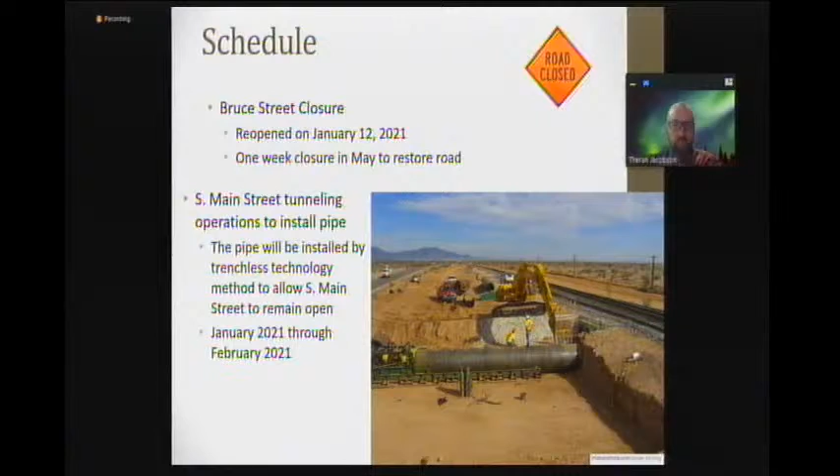This is just a more detailed image. Bruce Street was closed and reopened as of yesterday. It will be closed for a week in May to put the permanent pavement down. Below is a snapshot of another project's trenchless installation going under a railroad. You can envision that looking like Main Street within the next week or two. That's all I have on that one.